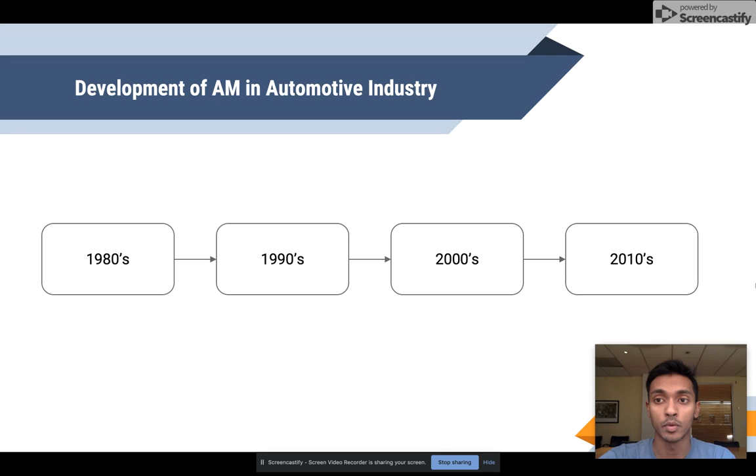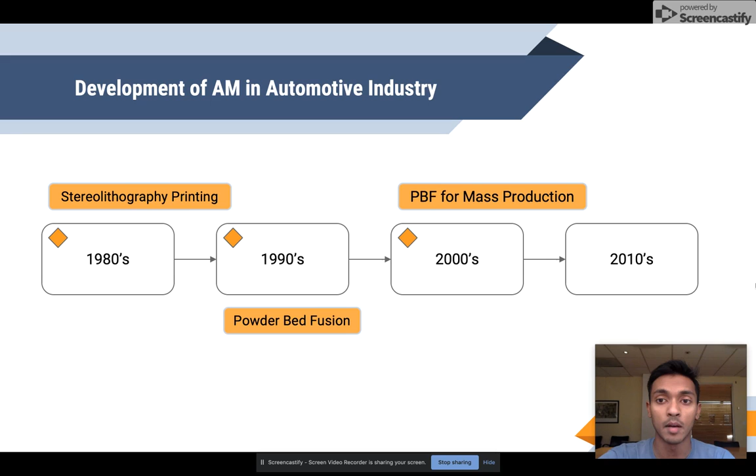Over 30 years ago, additive manufacturing found its roots in the automotive industry with the Ford Motor Company purchasing the third ever 3D printer. Since then, additive manufacturing has started to see a higher rate of adoption in the automotive industry. This technology has been used as a source of product innovation and a driver for supply chain transformation. New cars have been coming out quicker and quicker with the ability to now produce lightweight parts in highly customized geometries.

Additive manufacturing can be utilized for specialized production of parts. One application of such is through new production batches of old OEM car parts. As models go out of production, spare parts for these cars become challenging to find. Additive manufacturing has allowed these OEM manufacturers to create limited runs of unique parts. This mitigates the high tooling costs associated with these components, thereby making these parts accessible and, as an added benefit, more affordable. Additionally, PBF is used in creating personalized parts in motorsport.

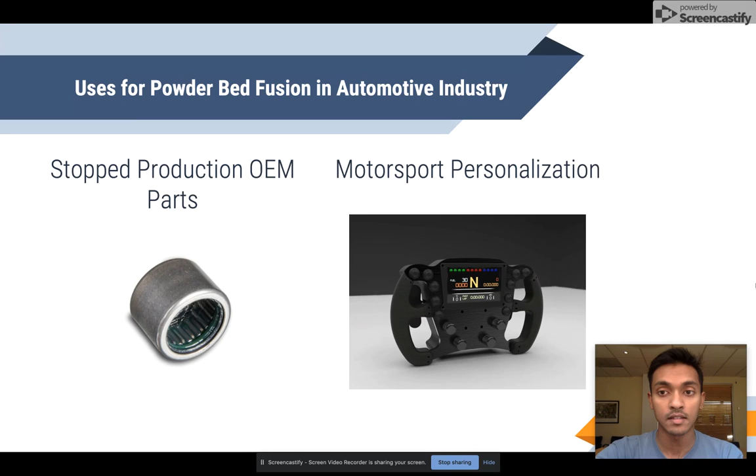Each driver may have a unique set of requests that optimizes their driving experience and that are subject to change. Additive manufacturing allows these teams to quickly produce these new parts and enhance the driver's experience. Companies like SLM Solutions are leaders in the space of PBF in the automotive industry. These PBF solutions make use of materials such as stainless steel, titanium, aluminum, cobalt chrome, and steel. And these allow companies to diversify the products that they're creating.

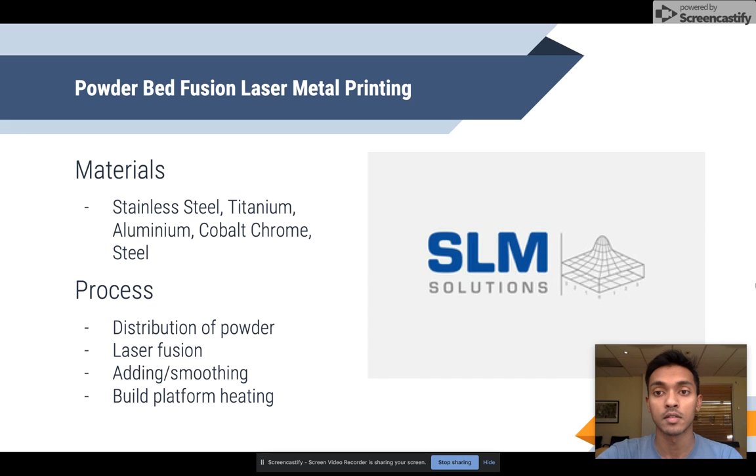We have discussed PBF in the past, but I will give you a brief overview of how the process works. Powder bed fusion methods use either a laser or electron beam to melt and fuse material powder together. A layer of material, typically a tenth of a millimeter thick, is spread over the build platform. A laser fuses the first layer or first cross-section of the model, and a new layer of powder is then spread across the previous layer using a roller. Further layers or cross-sections are fused and added, and the process repeats until the entire model is created. Loose, unfused powder remains in position but is removed during post-processing.

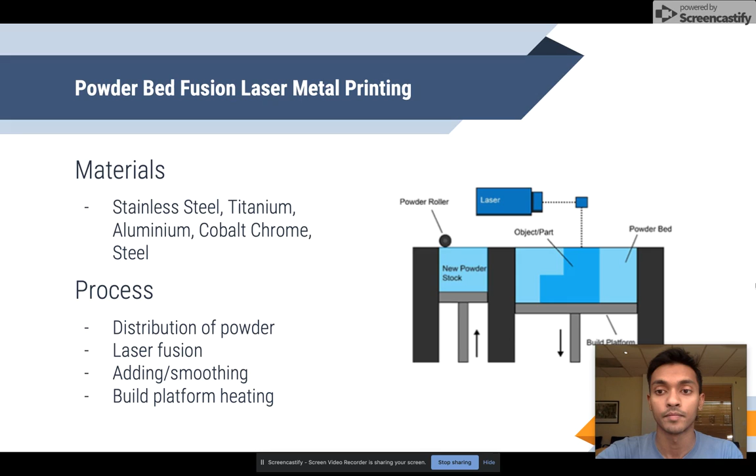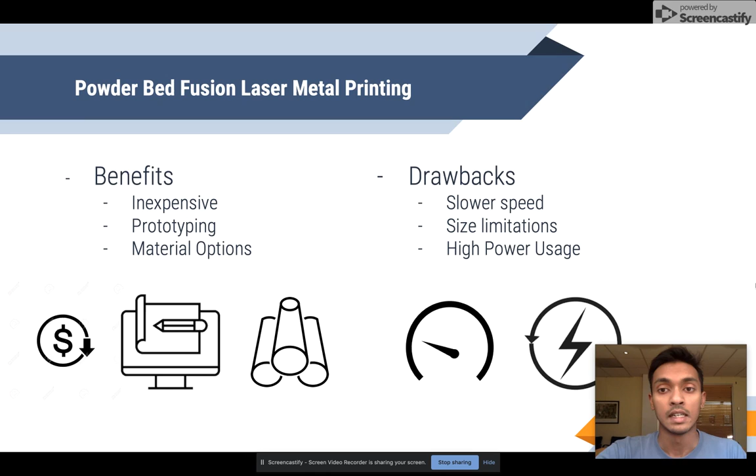Now, the benefits of using PBF include the fact that these methods are inexpensive, offer the ability to reiteratively prototype, and make use of stronger base materials. In terms of drawbacks, however, this process typically takes some time, has limitations in size, and requires high power input. The automotive industry also utilizes the binder jetting additive manufacturing process.

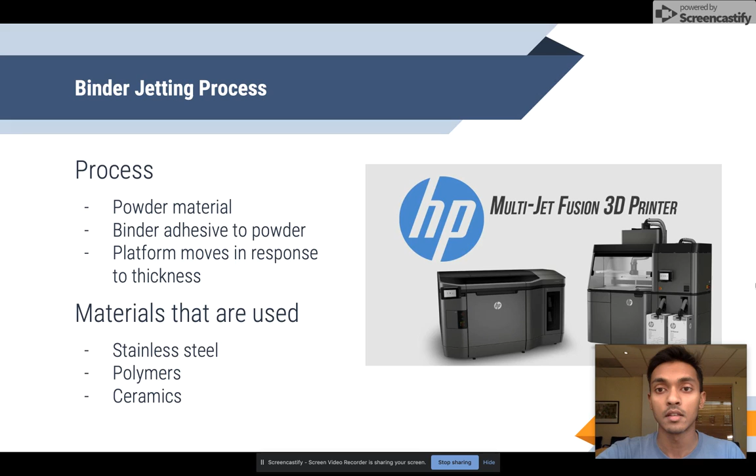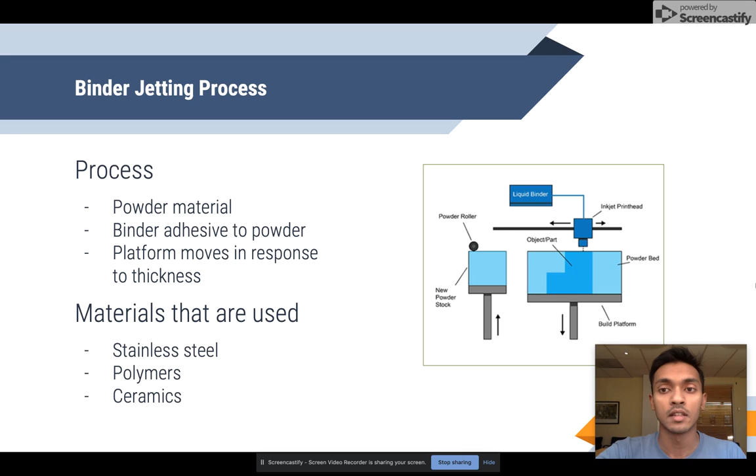This again uses a powder material, but instead uses a binder to create these 3D structures. In essence, a powder material is spread over the build platform using a roller. The printhead deposits the binder adhesive on top of the powder where required, and then the build platform is lowered by the model's layer thickness. Another layer of powder is spread over the previous layer, and the object is formed where the powder is bound to the liquid. Unbound powder remains in position surrounding the object as support material. Binder jetting is a little bit more flexible in the materials that can be used and allows for enhanced material strength with the opportunity to combine multiple materials.

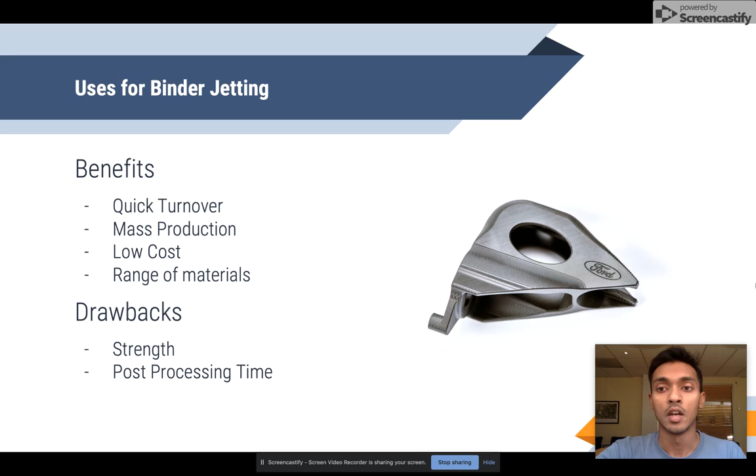Binder jetting is applied mostly in industry due to its set of benefits. The ability to quickly produce parts creates value in integrating the product in the assembly line. Additionally, this modality is low in cost and, as mentioned previously, allows for the use of a diverse range of materials. All told, this offers manufacturers diversity in rapid production of automotive components. Binder jetting does fall short in some respects. For instance, these materials do not have the strongest strength profile and can also, depending on the particular geometry, require some post-processing. This processing includes infiltration or sintering.

Looking forward, 3D printing in the automotive industry has a few interesting applications. Most impressive is the ability to fully 3D print cars. Elementary examples of this do exist, and as an understanding of the intricacies of the software improves, the utilization of this technology will increase. Tangentially, costs of additive manufacturing are decreasing, which allows smaller companies to prototype and test their unique concepts. This trend in unique features translates to current manufacturers, as well as companies like Rolls-Royce, which are currently integrating additive manufacturing techniques in order to highly personalize each of their customer cars.